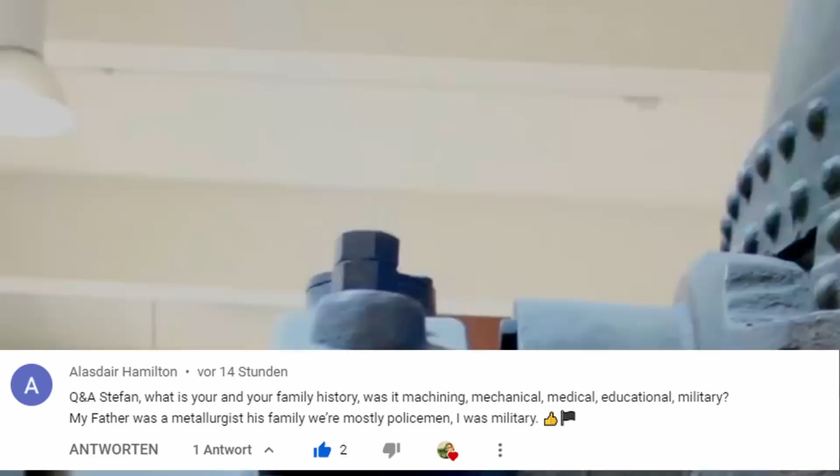So, Alasdair Hamilton asks, what is your and your family history? Was it machining, mechanical, medical, educational, military? Well, we're all kind of hands-on people. My dad was a tool and die maker. My mother was a butcher. My grandpa was a bricklayer. My brother is a Radio- und Fernsehtechniker, a TV and radio repair electrician, but today he works as a database specialist programmer. So we're all kind of hands-on. The only one who was in the military is my grandpa on my father's side of the family, but I never knew him. And myself, I served in the Bundeswehr for the 9 months that we had to do. But since then, nothing military related anymore.

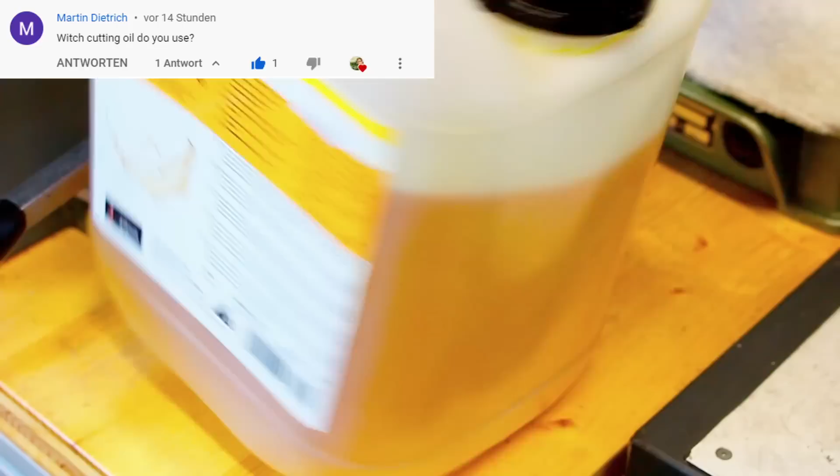Martin Dietrich asks, which cutting oil do you use? That's an easy one. I use Jokisch Heavy Duty Cutting Oil Alpha 93. I like this a lot. I think it's plant oil based. It doesn't smell. It's not very smoky when it burns. It works well in steel, stainless, titanium, and all the weird materials. It doesn't stain materials, which some of the chlorinated cutting oils do. It doesn't ruin my skin. And I buy it in these large 5-liter canisters. It's really not very cheap. I think this canister is like $100, but it lasts quite a long time.

Micromechanics and micromachining is not a common task as paid work. How do you find your clients for such niche specifications? Well, they find me. The word is out there that I do this kind of work. I have basically with my YouTube channel a showcase or a portfolio of what I can do and what I do. And people come to me with this kind of work.

And also that's kind of the specialty work that I like to take on most of the time. I do some other stuff too, but everything that's smaller than my thumb, that's what's really fun for me and where I think I can excel as a machine shop and as a machinist.

Kepa Murray asks, what are your 5 favorite bands? Do you listen to music while you're working in the shop? That's a very good question. And the answer is yes, of course, I listen to music in the shop. I listen to podcasts a lot, but also music. I'm either wearing Bluetooth in-ear headphones or I have loudspeakers.

Favorite bands, favorite 5 bands. I probably have 20 favorite 5s. Let's see. Sabaton, Hammerfall, Powerwolf, Blind Guardian, Nightwish, or Running Wild, Arch Enemy, Agatha Diamond. We can go on and go on and go on. Also, Perturbator, Carpenter Brut, things like that. Mostly metal, some dark ambient, some gothic, some things like that.

Mechanical engineering. The truth is, I haven't studied anything. I'm a Facharbeiter, means I served an apprenticeship in mechatronics, means I'm half mechanic or machinist and half electrician or electronics guy, also a little bit of PLC programming, hydraulics, pneumatics. We're basically the Swiss Army knife of automation. But in reality, I specialized on the mechanical side of things.

While on the topic of music, George M. asks, what are the best German metal bands that poor uncultured foreigners would never ever have heard of? Well, Rammstein is a simple one, but those are very, very well known. I would say Running Wild, Paragon, Powerwolf, and of course Gravedigger, and of course Blind Guardian. But those are a little bit better known. And not to forget the ever awesome metal a cappella band Van Canto. They are hilarious, they make great music. Look them up, listen to them, and thank me later.

Dwayne Dickey asks, what company did you do your apprenticeship with? The company I work for is also the company I did my apprenticeship with. And that's Siemens. The part of Siemens that's doing the RCDs, breakers, AFDDs, all switchgear stuff.

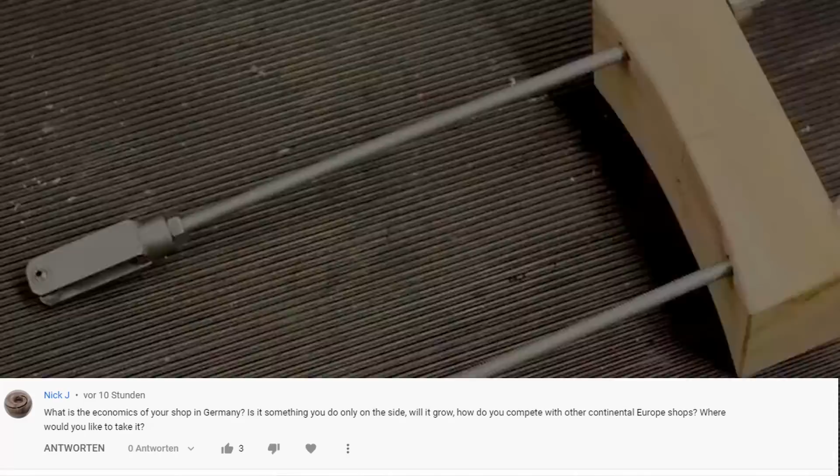I would like to be able to live completely off my own shop and obviously off YouTube. YouTube is highly volatile. It could end from one day to another if Google or the associated AdSense system makes a major change. But then I still have a Patreon where people can support me. But in the end, I want the shop to be completely self-sufficient and be able to live off it.

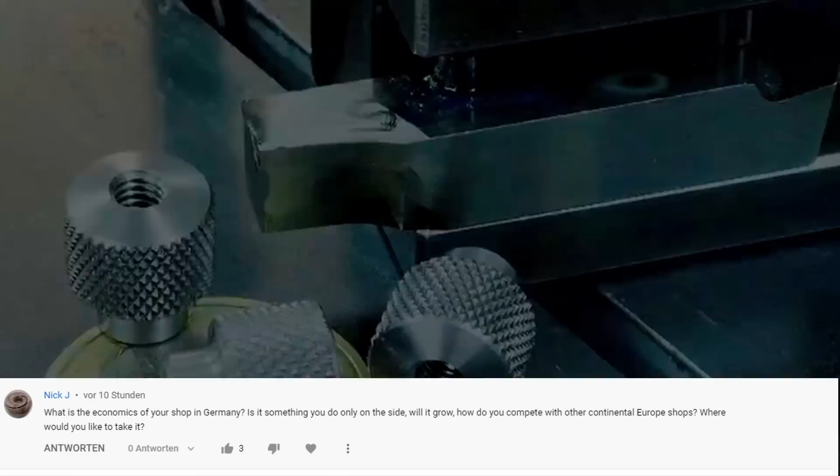I'm not interested in having employees. I want to stay on my own in the shop. Currently, I'm working part-time. I'm working 28 hours per week. That's 4 days at my day job as a mechanic or machine builder, and the rest of the time I work in my own shop doing customer work and of course YouTube.

The question of competing is not that critical for me because usually the work I do, larger shops with heavy duty machines, with large VMCs or CNC lathes are not interested in the work that I take on and vice versa. So that's working quite well for me.

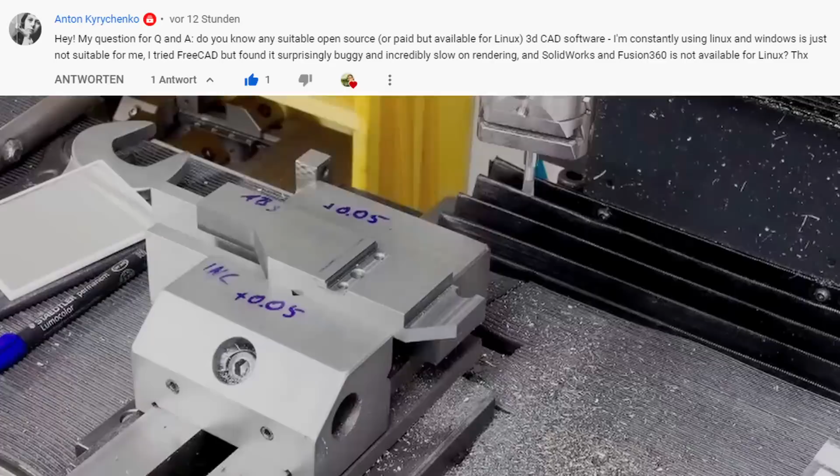Hey, my question for Q&A. Do you know any suitable open source 3D CAD software or paid but available for Linux? No. Well, yes. There is FreeCAD, but it's super janky. It works, but it's janky. It has a long way to go. I think at some point in its lifetime it will be usable, but currently, there are people who make it work, but to be productive, if you know commercial CAD packages, it's really tough.

There used to be a Pro Engineer version, I think that was before Wildfire 3, that ran on Linux, but I don't think you can get that anymore. You can run Fusion 360 in the Wine environment, or you can run it in VirtualBox. I did that quite some time, but it's also quite janky. To be honest, the best solution to run CAD on a Linux system is to have a dual boot system.

Hi, one question. What are the necessary tools to start learning scraping, with no shop at hand, just a bench, patience, and a few euros to spare? A good source for the theory would also be very appreciated. So for scraping, you don't need much. You need a scraper, preferably with a carbide blade. Yes, you can take an old file and reshape it into a scraper, but if there is any possibility, get a scraper with a brazed on carbide blade, make one yourself, or buy, for example, the Sandvik carbide scraper.

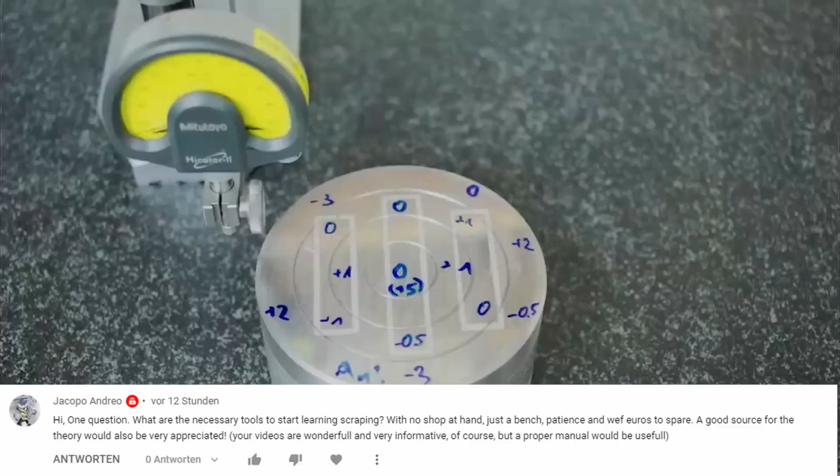Then you need a way to sharpen the carbide scraper or the normal scraper. A bench grinder with a diamond wheel will do. If you're really in a pinch, a diamond file and 2 different grits will work. There are many ways to do that. Or you can even build a diamond lap for very cheap with a piece of aluminum, an old motor, and some diamond paste.

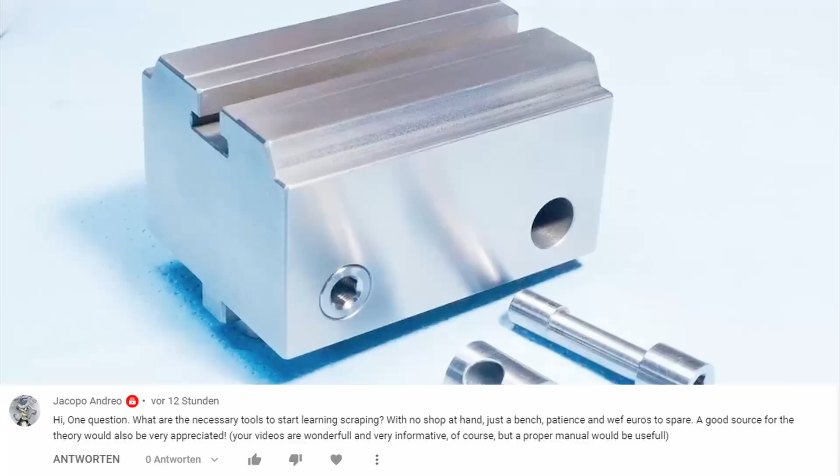Then you need something to scrape, a part that you want to work on, for example, just an old angle plate to learn on. You need a master surface, like a cheap import granite surface plate. That's honestly the cheapest way to get a flat reference surface. Or you buy a used surface plate. If you want to do machine ways, you need straight edges, of course, but that's advanced already. For the beginning, you really need just a reference surface, high spot blue, for example, from Diamond or Dykem, and the carbide scraper, or a normal scraper.

And as for references or resources, well, I have 2 videos on scraping, which are horrendously outdated, but the theory is not wrong in there. If you need it in English language, you can go on Practical Machinist. You will find there is a machine rebuilding forum. You will find about a bazillion posts on theory there, and a lot of ranting and a lot of insulting each other, but there is good information on there. And of course, Connelly's machine tool reconditioning book.

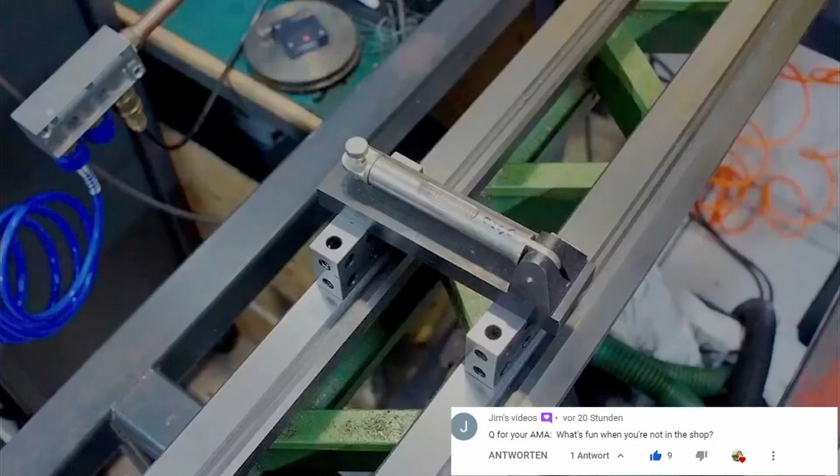Jim's videos asks, Q for your AMA, what's fun when you're not in the shop? Well, I'm an avid cinema visitor. Nothing compares to watching a movie on the big screen.

When the lights go out, it's just movie time. We pretty much watch everything that's newly released. But also the cinemas in the next city also show older movies. Like recently we watched a screening of the original Blade Runner, which I'm too young to have seen in the cinema, but that was a great opportunity.

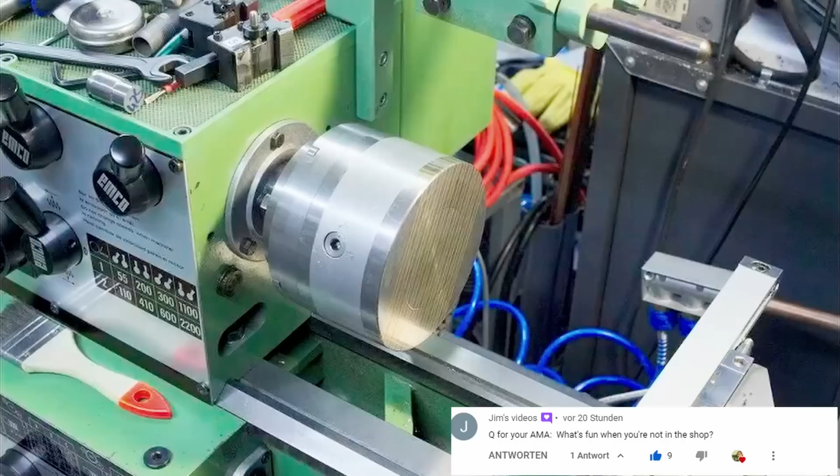Also when I'm not in the cinema, I like to watch movies in general, 70s, 80s, 90s. Action, sci-fi, and horror, exploitation movies. That's the style of movies I like.

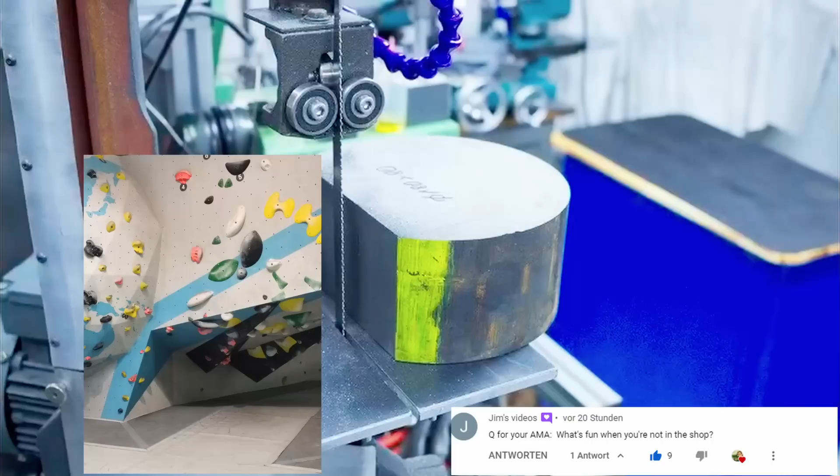Also, a little bit over a year ago, I picked up bouldering, like indoor climbing on walls that are about 4 meters tall, and you climb without safety gear. I picked that up due to a good friend, and I'm going about 2 to 3 times a week, and it's really good. It helps me. It's good for my general health. It's good for my mental health, and it's a tremendous amount of fun.

And also, I notice good progress when I go there, and there is a new route mounted in the wall, and you look at the route and you just notice, oh, I understand how this will work. I can do this. And then you just work your way through the individual steps to figure out how to solve a certain problem. It's problem solving, just on a more physical level.

Also, I have to care for a house and 1,800 square meters of garden, so it doesn't get boring for me.

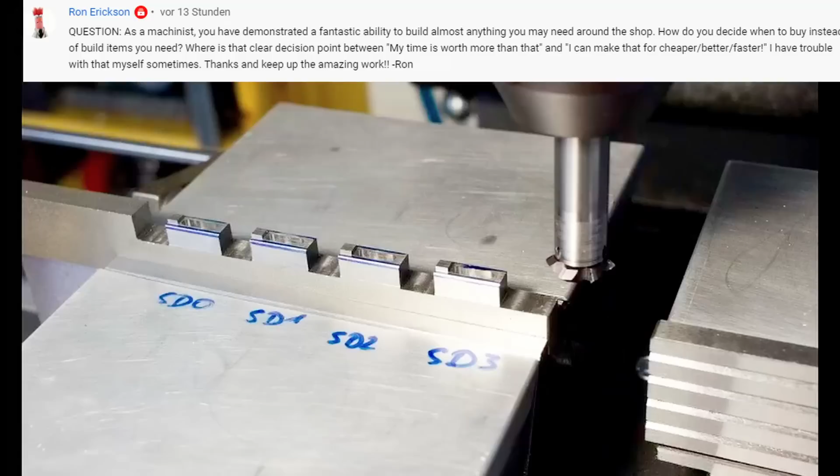Ron Erickson asks, as a machinist, you have demonstrated a fantastic ability to build almost anything you need or may need around the shop. How do you decide when to buy instead of build items you need? Where is the clear decision point between my time is worth more than that, and I can make that cheaper, better, faster? I have trouble with that myself sometimes.

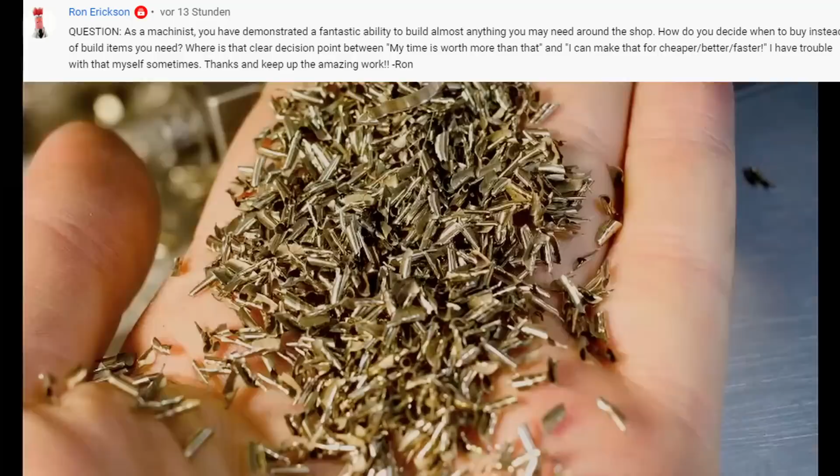Well, we all have that problem. I can make that cheaper, better, or faster is in almost every case a lie to yourself, to be honest, if you consider a decent hourly rate. When I was more of a hobby-oriented shop, of course, I had more time than money. Then the question was easy. Then I just built everything myself. You just need to go back in my YouTube channel and you see what happened. I built everything.

That has kind of unfortunately gone away since I do a lot of customer work. In these cases, often it's the case of, can I get it? Can I get it fast? And where can I get it? And then I will just order it and buy it, as sad as it is. But I still make stuff for myself, either as a recreational project like the toolmaker's cubes that I'm working on, or the rebuild and improving of my D-bit grinder, but those are long-term projects once again.

And yeah, or if it's something that you just cannot buy. For example, the low-profile V-block that Adam Demuth made and sent me one of. I have not seen something like that commercially available, so that's a case where you have to make it yourself.

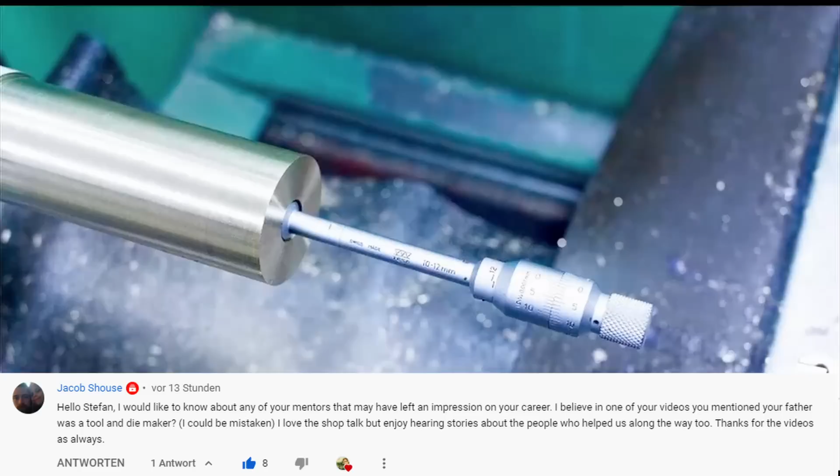Jacob Shouse asks, hello Stefan, I would like to know about any of your mentors that may have left an impression on your career. I believe in one of your videos you mentioned your father was a tool and die maker. I love the shop talk, but enjoy hearing stories about the people who helped us along the way too.

Yes, my dad was a tool and die maker, and I learned a tremendous amount from him, mostly by him just walking in the shop and looking at what I was up to and what I was working on, and just giving comments and giving little pointers and little hints.

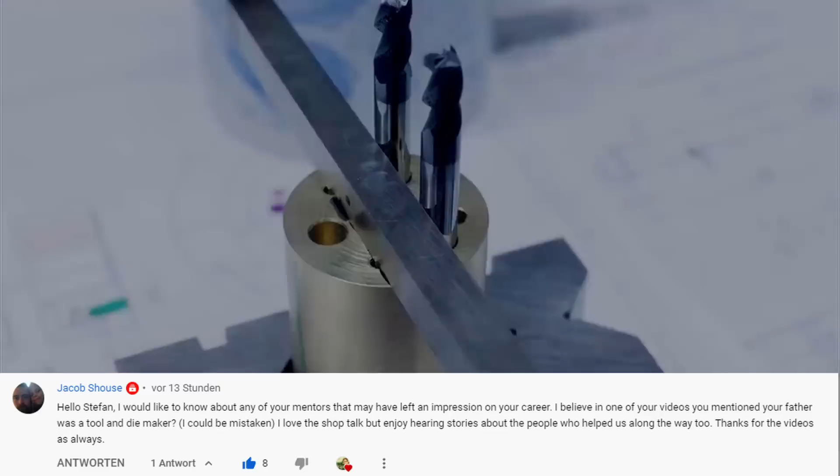In my professional life, I had a lot of people who made a large impact on my abilities today. I used to work with an old tool and die maker when I was in the laboratory, when I did mechanical stress testing and electrical stress testing on light switches and outlets. And we built all the test gear ourselves. And he was a tool and die maker through and through, and I learned a lot from him.

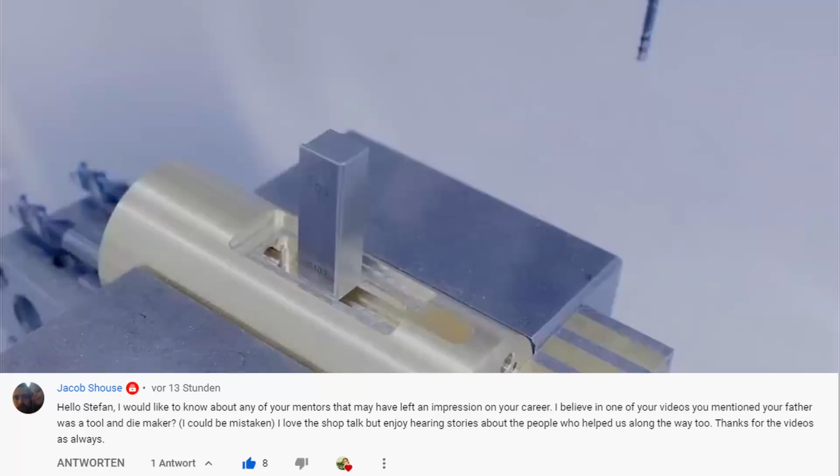Also, my foreman, when I was in prototyping at work, he had about 20, 30 years of experience in prototyping. He was not a machinist, but he was able to do bench work really well, like picking out corners in milled parts with gravers, bending parts. Bending was really his specialty, bending parts in a vise or on a press brake with custom dies. I picked up a lot from him.

We were always questioning each other when we were talking about work. I was questioning his recommendations and he was questioning mine, and so we had checks and balances on whether that was the right way to do a certain job.

Well, and pretty much every other person I came across in my professional life, I was able to learn something from. And I think you can pretty much learn something from anyone.

In your taskbar, I noticed Steam running. So do you game frequently and what games do you play? Well, look in my Steam library here. Rainbow Six Siege, 500 hours. That is probably the game that I played the most over the last years, and I enjoyed it a lot. The destructible environment is really a neat element in the game. But it seems like they take it away because it's problematic with a high level of competitive gameplay, because it's very random when you blow through a wall. And of course,

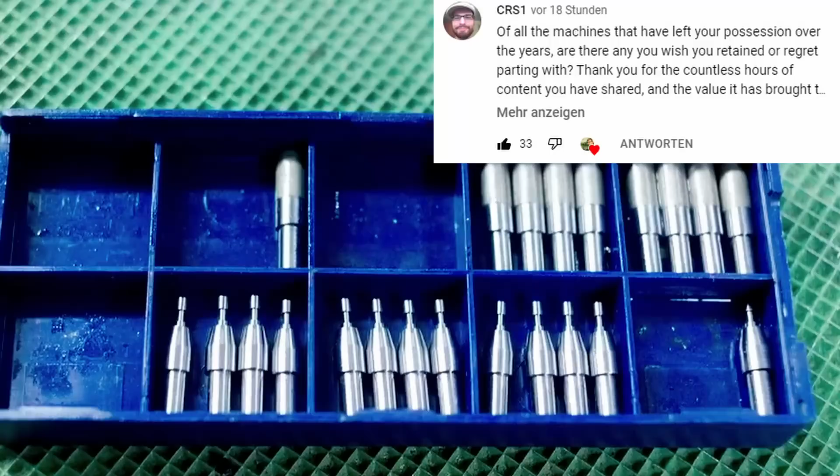Same for the CNCs. I had the easel CNC router. I had the old Deckel that I converted to CNC myself. I had the stepper motors, and I don't miss any of them. The machine I have now is the most suitable for the work I do now.

Shawn Huk asks, Stefan, what do you use for rust prevention when you're washing parts and tools in water? Well, not much. When I take the parts out of the parts washer with the cleaning solution I have in there, which is basically very strong soapy water, I either rinse them with alcohol or distilled water, blow them dry with compressed air, then I just put them away. Usually that's more than adequate for the level of humidity I have in my shop. I have usually about 22 to 25 degrees C in my shop and a humidity of 45 to 55%. And that seems to take care of rust problems good enough.

For general rust protection, I use two products which I'm not sponsored by, but that I use. One is LPS3. I think that's very common in the US. I learned it from Robin Renzetti, and you spray this on, it dries in a film, it's really waxy. I put this, for example, under the vises of my mill or under the solid tool post on my lathe, or when I have to put parts in deep storage, I will spray them down with the stuff, then just wrap the parts either in paper or in wrap foil.

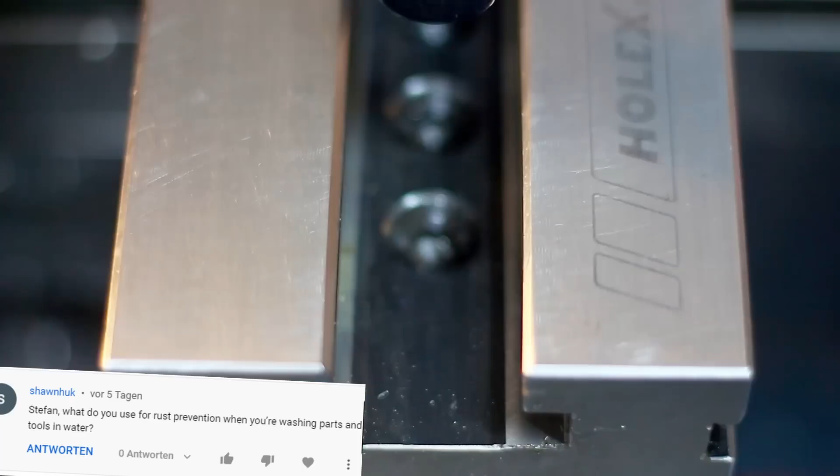And here, for comparing those two, this is the LPS3. This is a very thick material. And when it dries, it will leave a film with a real thickness to it. And this is the Ecol. As you can see, this is way thinner. And when you just spray it on in a thin layer, it will also dry that way. And this will wipe off very easy.

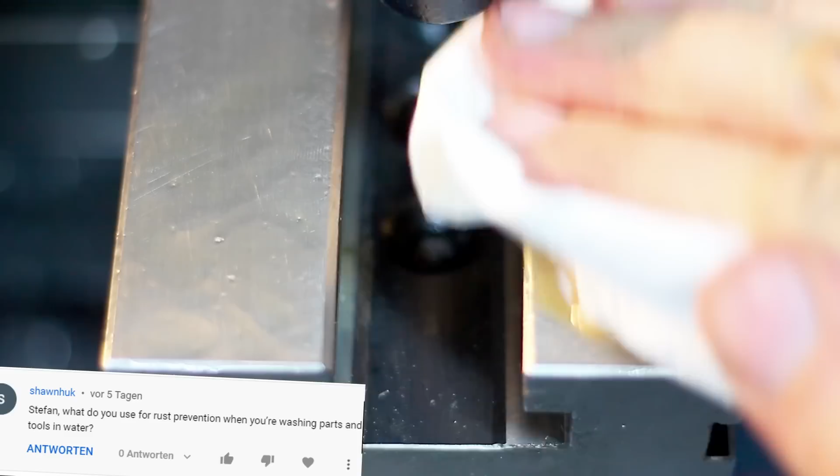And both of them are excellent rust preventives. I never had issues with them. The LPS3 stands up to coolant and cutting oil and stuff like that, like crazy. A little bit hard to get here in Germany. For those in Germany who ask where I get this stuff, there is one person on eBay who regularly sells about 1 to 3 tins of this stuff, and I usually just buy all of them when they're available.

Lars S. asks, sure, you have been asked many times, but what brand are those safety glasses you always wear? These are made by Uvex. They are prescription safety glasses, and I have two pairs of these. They are identical. Uvex is a very common personal safety equipment manufacturer here in Germany. They make safety glasses with or without prescription, safety boots, safety shoes, earplugs, hearing protection, basically everything that you need to not die on the job.

And I like these a lot. They're very comfortable to wear. They close up nicely on the side of my head, and I wear those as everyday glasses. So if you see me out on the street, I'm most likely wearing these because I have no clue where my other glasses are. Highly recommended.

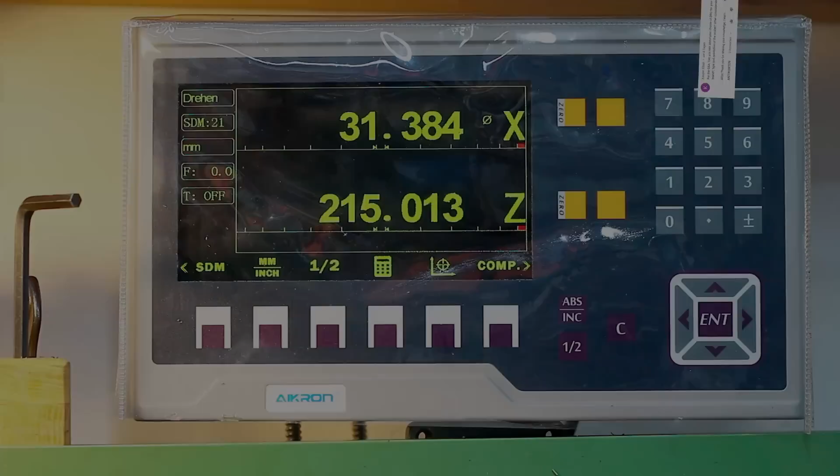Kasper Elbak asks, can you talk about the choice of DRO for your lathe? Which brand, type, resolution of the scales, other considerations? So for the longest time I used to have a different one, the old school style with the 7-segment LED readout, but I changed to an Aikron LCD DRO, and I like this a lot. It does the same thing as the other one. The other one worked perfectly fine. I put that in deep storage for cases of emergency. The LCD ones are nicer to use.

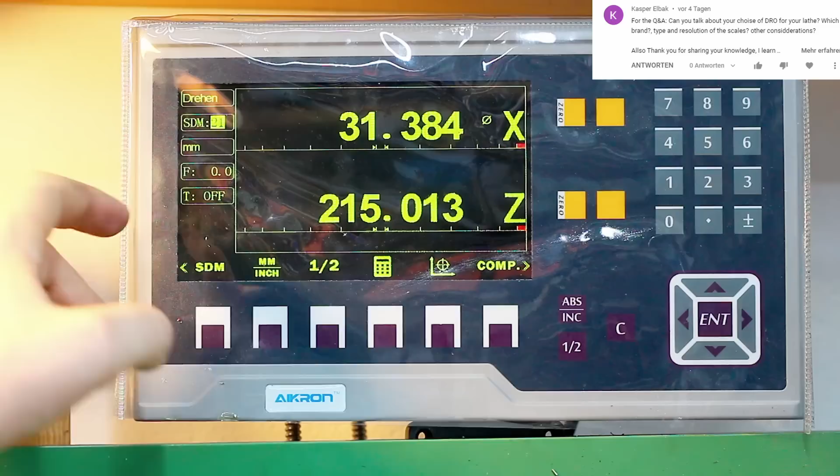On the lathe you don't need that many options because it's just a lathe. On the mill you have other options, but basically you have your different coordinate systems here. These need to be easily accessible on a DRO because you use those either for different operations or, in my case, as a tool storage. SDM21, for example, is on my lathe a parting blade. And when I switch through those, 22, 23 is a grooving tool, and you see that those offsets change when I switch through the tools. And this is absolutely important for a lathe DRO in my mind if you want to be productive, having the option to change through tools.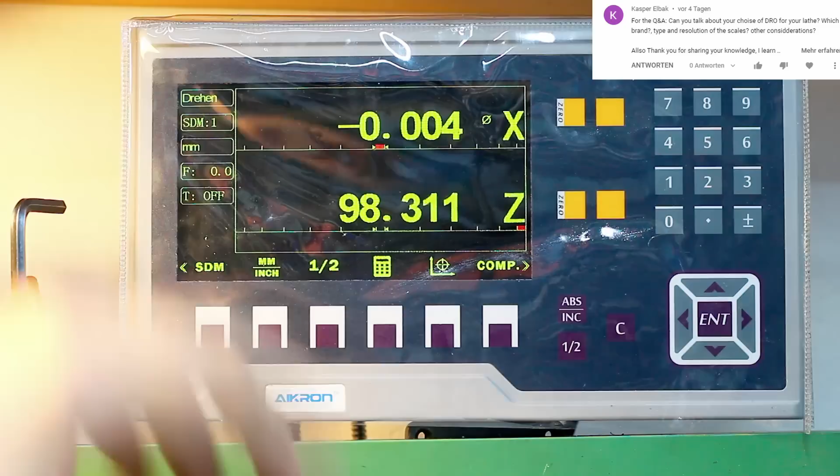Also, the LCD DROs have this indicator bar down here. This shows you when you approach your 0. When you set up a production job with different coordinates that you need to step off after each other, and you use, for example, SDM 1 to 10, and you enter the coordinates in ways that you always move the axis to 0, then change to the next coordinate system, move to 0, next coordinate system, and so on. This indicator here is extremely helpful because it allows you very quickly to approach very precisely your 0 mark. See how quick that goes?

Just by eyeballing the red bar into the center mark here, you don't even have to really look at the numbers to get it within 20 micron. Also, you want your buttons easily accessible for zeroing out your positions or for entering coordinates. You want a calculator in it. You want an easy way to switch between metric and inch.

Well, that's on the lathe. That's the most important facts on the lathe. My cross slide scale has a resolution of 1 micron, but the DRO reads it in 2 micron because I'm doubling the value to get the diameter. So this is in diameter mode. I can switch it to radius mode, then it reads 1 micron, but we're working in diameters on a lathe, so I'm running this in diameter.

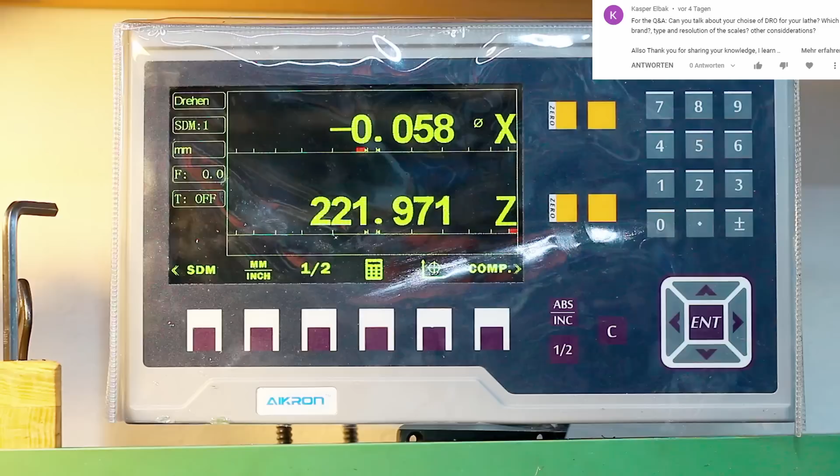And the bed slide is also a 1 micron scale, and as you can see, I can move the bed slide of this lathe relatively precisely within a few micron using the big hand wheel. Also, a very useful feature, it shows the current feed in millimeters per second. I think there is a software update from Aikron coming that changes the feed display to millimeters per minute, which is the way more common unit. So yeah, that's the readout. And let's go to the mill quickly.

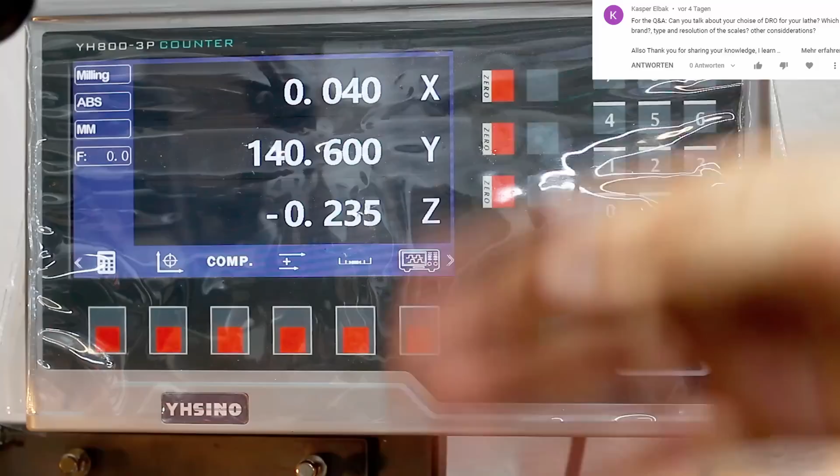This is a Yhsino from, I think I bought this on Banggood for a ridiculously low amount of money, and I would not buy this again. It does not work with all linear scales. The linear scales I have, they have an A, B and index signal, and they also have the negative signal. So A negative, B negative. And this readout cannot handle these linear scales in my case.

I had to change the wiring on those linear scales. It means I had to cut the wires for the negative complementary signal. Now it works. In theory, this makes the readout and the linear scales more prone to counting errors, but I haven't noticed any problems so far, so I'm keeping it.

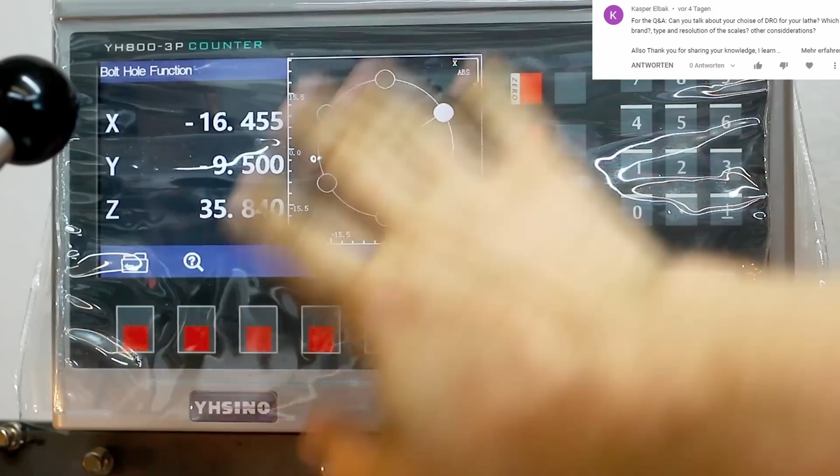On a mill readout, you have the bolt hole circle function, and on a graphical DRO with an LCD, this is really neat because you really have the red dot, which is your current position, and you just crank it in position by eyeball, and then you look at the numbers and get it into final position. So this is way faster than just looking at numbers and moving it. Then you just can switch through the points that you programmed and move to all those positions and drill your holes out, or whatever operation you have to do.

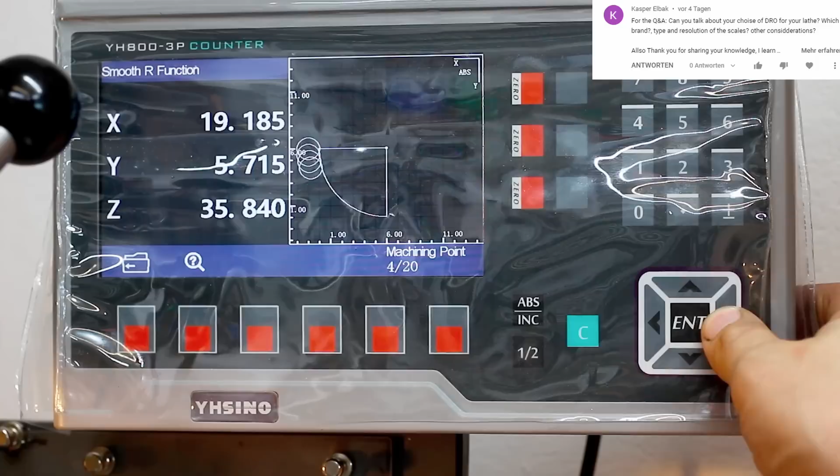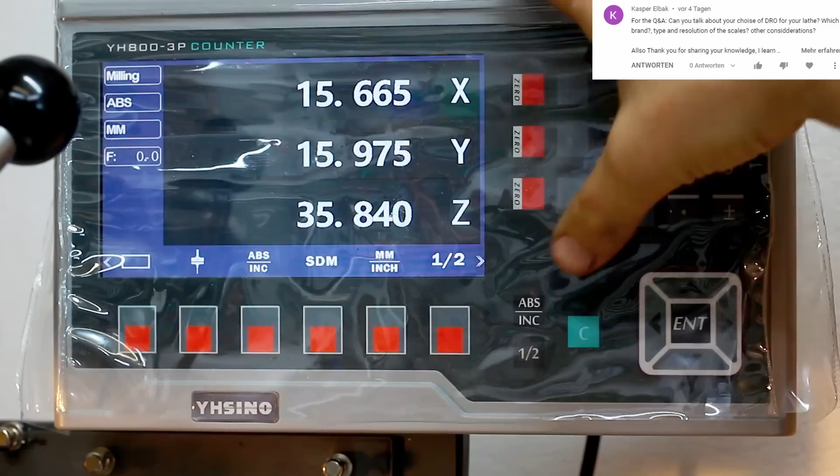You also have this for hole arrays. You can do circle milling, which allows you to cut radii in a cusped manner by moving off in individual steps and creating kind of a radius that way. You can do this in XY or also in XZ and YZ if you want to do a top-down radius. Then you have a function to cut a pocket. Don't use that ever. Probing, this one doesn't have probing, doesn't have the input plug for it mounted. Yeah, that's the important functions on a DRO for a mill in my eyes.

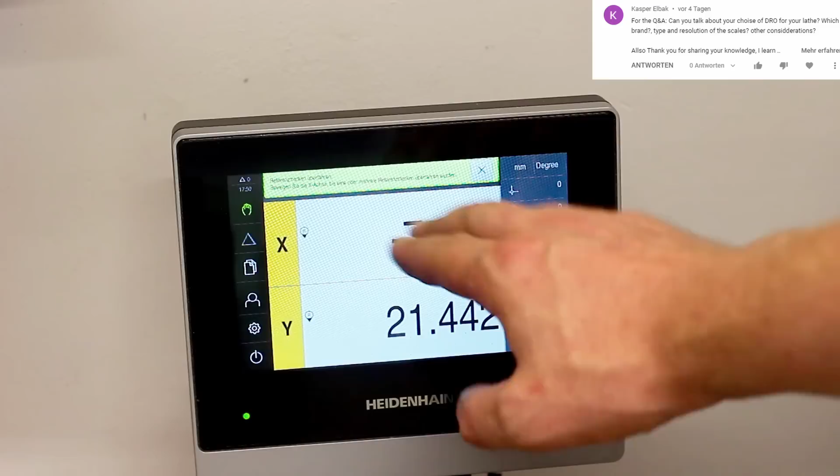Little trick, if you have a touch display DRO, go on the internet, find a place that cuts screen protectors to size, and have them make a screen protector in the Gorilla Glass equivalent matching your DRO, and this will protect your horrendously expensive DRO display. And this is really nice. I have it set to 1 micron showing. The linear scales are analog, and this readout interpolates them, I think, to 0.1 micron, and I can set it even to that, but then it gets a little bit jumpy. But in this case, 1 micron is perfectly fine.

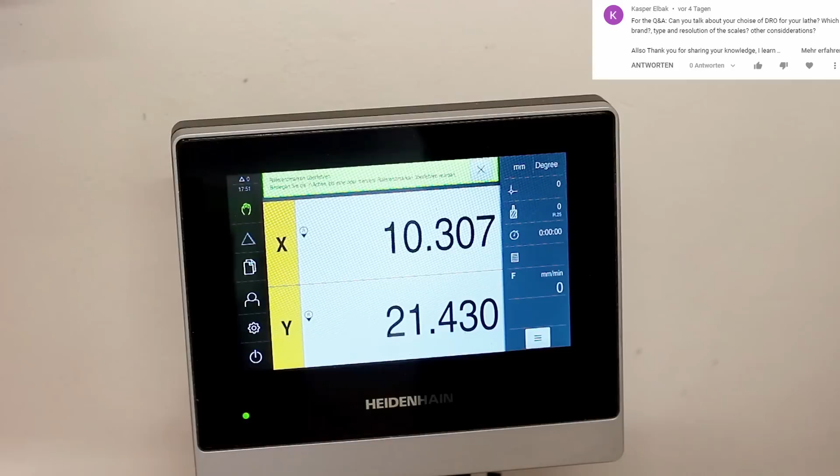And this also shows the current feed rate when you hand crank it in millimeters per minute, which is the more sensible unit. And this is very nice when you dress, for example, your grinding wheel and want reasonable, repeatable parameters, because you just can traverse, for example, with 300 millimeters roundabout over the diamond and get your even dress. It has some functions like bolt hole circle, which I don't need here on the grinder, because this is a mill and lathe readout. They don't make a specific grinder readout.

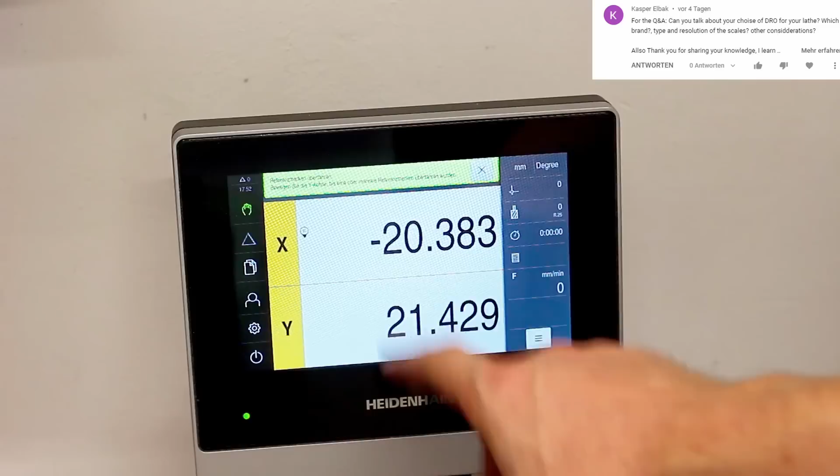Also, my axes are named wrong. It's XY in my readout. Usually it would be Z for the height elevation and Y for the cross traverse, and the table movement back and forth would be X. But I keep it this way because I can use the bolt hole circle function in here to do radius grinding. This doesn't work if the axis names are off.

Back at the mill for a second. The resolution on the mill is 5 micron per division. I found that perfectly adequate for the style of work I do.

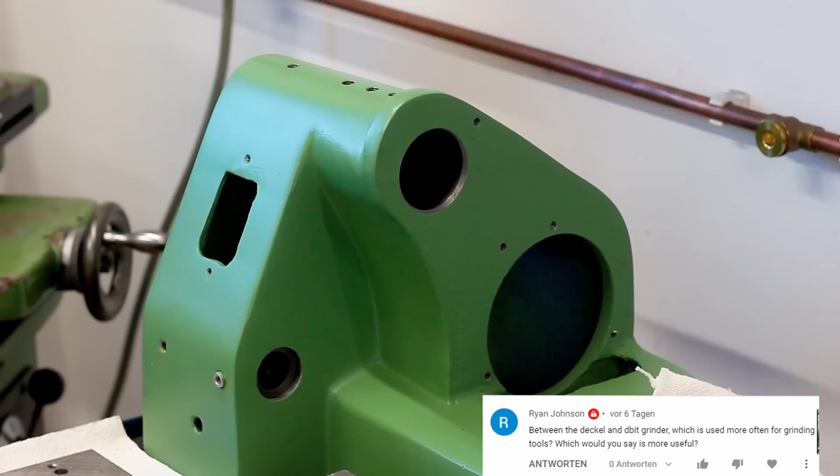Ryan Johnson asked, between the Deckel and D-bit grinder, which is used more often for grinding tools? Which would you say is more useful? So I have a little bit of a grinder addiction. I have the D-bit grinder. I have the Deckel S1 tool and cutter grinder, which is a full-fledged tool cutter grinder. And I also have the Bema surface grinder. Between all those 3 machines, they all serve for tool grinding in my shop.

If I could have only one machine for grinding, it would be a surface grinder, because it's the most universal machine from all 3 of them. And it's the best surface grinder, and it's the best cylindrical grinder with accessories. It cannot do spiral flute tooling, or not without heavy trickster movements. But apart from that, if you want a grinder and you can afford it and you have the space for it, a surface grinder is the way to go.

For example, a small Harig 6x12 surface grinder would be a tremendous addition to any shop. Not only surface grinding, not only cylindrical grinding using a spin fixture or a punch grinder, but it's also an excellent tool grinder for lathe tools, for example. But it can also do mill tooling if you're creative.

Then we have the S1 tool and cutter grinder. Super cool machine, can do spiral flute tooling, can do tooling between centers very easily, very fast to set up for a tool and cutter grinder. You need sometimes to wrap your head around all the possible movements, and sometimes that's the hardest part of grinding tools. I would say this is more of an expert machine. I have no clue why I have it then, because I'm not a tool grinding person, but I like to use it.

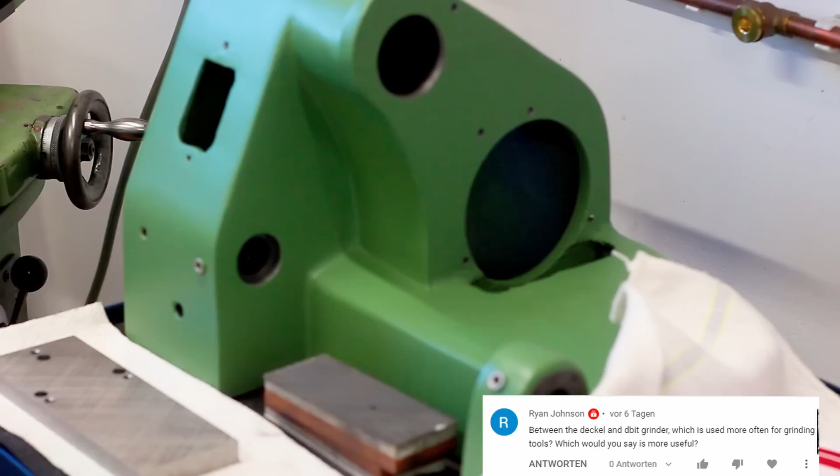And then the D-bit grinder. D-bit grinder in parts, part assembled here. The D-bit grinder is a must-have machine if you can have only one grinder and cannot afford a surface grinder, but you need tool grinding capabilities, then D-bit grinder. Great for grinding lathe tools. It's really good for that. It's good for grinding D-bits because it's made for that.

You can do 4 facet grinds on drills up to maybe 10 to 12 millimeters. Very good with it. You can cut carbide to length with it. You can cut high-speed steel blanks to length with it. You can do a little bit of cylindrical grinding on it, like creating a stepped punch or something like that. For the space this machine requires, it's almost ridiculous what it all can do.

Don't bother with the accessories like the helical grinding attachment. That's no good for this machine. It's too wobbly. Just get one with the regular indexing head, with the style of collets you prefer, probably 5C because they are more common and larger in size. Mine uses the Deckel collets.

Maurice Lucas asks, are you finished with the flux capacitor or is it still work in progress? Well, time will tell.

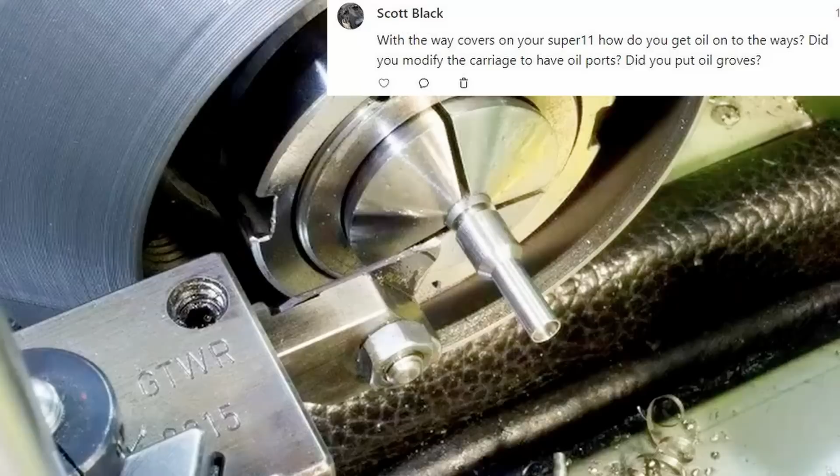Scott Black, with the way covers on your Super 11, how do you get the oil onto the ways? Did you modify the carriage to have oil ports? Did you put oil grooves? No, the carriage is still original. And I oil the bed and the carriage just as Emco intended by putting oil on the ways and cranking the carriage over it. I do that with a regular oil can. I just lift the way cover up a little bit and put some ISO 68 weight way oil onto the ways.

So der ProtoTyp asks, hi Stefan, one for the list of questions. Considerations on dust management in small shops where separate shop rooms for every department is not possible. I'd be especially interested in your thoughts on grinding dust, dry, wet grinding, carbide dust, and what filters and how often you change them.

So my general solution for dust in the shop is this contraption. This is a Festool CTL Mini dust extractor, a glorified shop vac with a relatively good filter class, as long as you run it with the filter bags. The filter bags are part of the filter class on these type of dust extractors. The problem is those are horrendously expensive, the dust bags that is. If you just use it to suck up chips or something like that, that gets very expensive very fast.

The solution, which has been shown on the internet about 1 million times before, is a cyclone separator. It's this thing up here, this funnel looking part. This will separate all solid media that has some reasonable weight to it out of the airstream into this metal bucket here on top of the dust extractor, and only air and fine dust will go in the dust extractor. And the combination of those two stages will filter out basically everything.

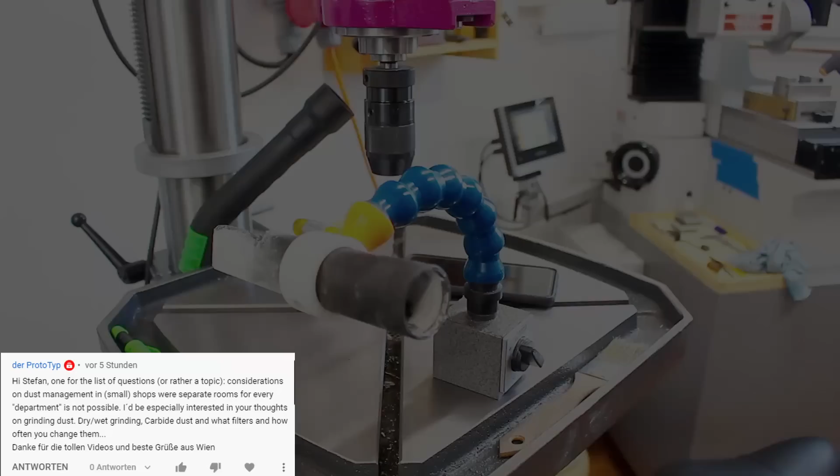This is one thing that I use on my machines. It's just a 50mm magnet base. I turned an adapter with a ball end that fits I think 3/4 inch Loc-Line hose. Then I have this ring on the end here that's just screwed into this nozzle. This nozzle, I cut the end down, I put a filler piece in there, and then I put a screw from the outside through this ring inside the filler piece, and this holds it very rigidly on there.

And the inside is turned to a taper. So when you take your regular shop vac nozzle and you push it in there, it will lock nicely due to its tapered shape. And the Loc-Line allows you to orient this very quickly and very easily wherever you create dust.

This nozzle is modified. I welded the end shut with a piece of plastic that I cut out of the side of this thing. Then I opened up the side completely with a die grinder and abrasive wheel. And this is so I can get behind a grinding wheel, for example, on the surface grinder when I grind stone or carbide. So the grinding wheel shoots the stream of dust directly into this nozzle.

Also, I can of course use regular straight nozzles like this one for a more pointed approach to dust extraction, for example on the milling machine when I mill phenolics. So this works really well. It's very simple, it works very well. Can't complain about it, very easy to make. The most expensive part is probably a good magnet. You can also use, of course, a large magnet out of a loudspeaker or something like that, but these are nice because they are switchable.

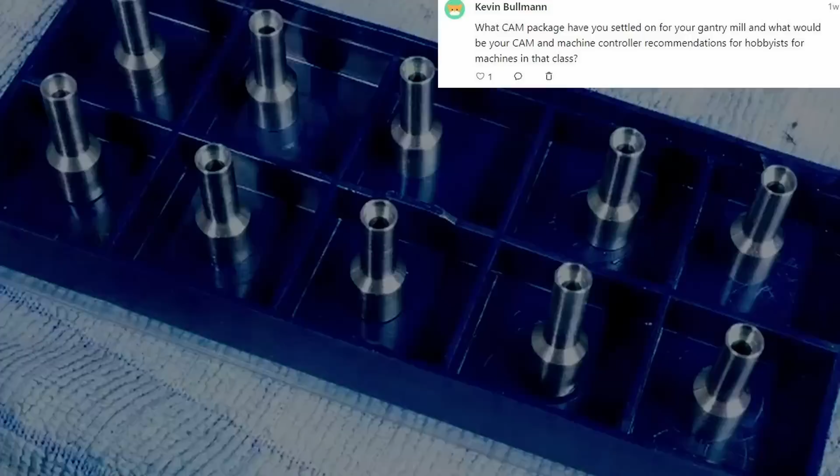Kevin Bullmann: what CAM package have you settled on for your gantry mill, and what would be your CAM and machine controller recommendations for hobbyists for machines in that class? So for the CAM package, Fusion 360, honestly, it's the most powerful CAM package that you will get for as little money. There is still the hobbyist license, it's limited. It doesn't allow rapid movements and tool changes anymore, but still toolpath generation is top notch.

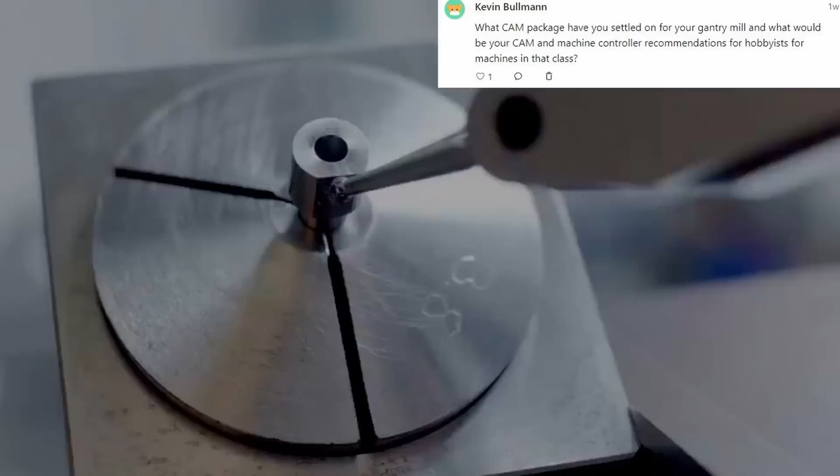If you get the license, the yearly subscription, I think that's $500 a year. That's real money, I absolutely understand that, but in my case, commercially, that's pretty much nothing. The big advantage of Fusion is just the integration of CAD and CAM together. When you change your CAD model, it pulls through into CAM,

and it's so much quicker than an external CAM software where you always have to export a STEP or IGES model from CAD, import it into CAM and redo your toolpaths, and that's a whole story. So yeah, it is what it is. Unfortunately, we don't have many options here. That's the CAM recommendation. For the machine controller,

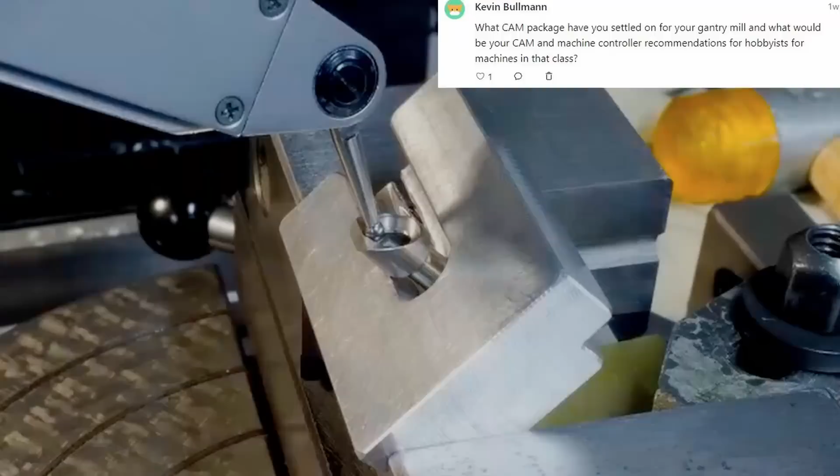if you're a little bit adventurous and are willing to put time into it, LinuxCNC. It's extremely powerful. You can either run it off the parallel port, or you can buy the Mesa hardware, which is an FPGA card that does all the step generation. All the time critical stuff will be done by the Mesa hardware, and it's super fast, super reliable.

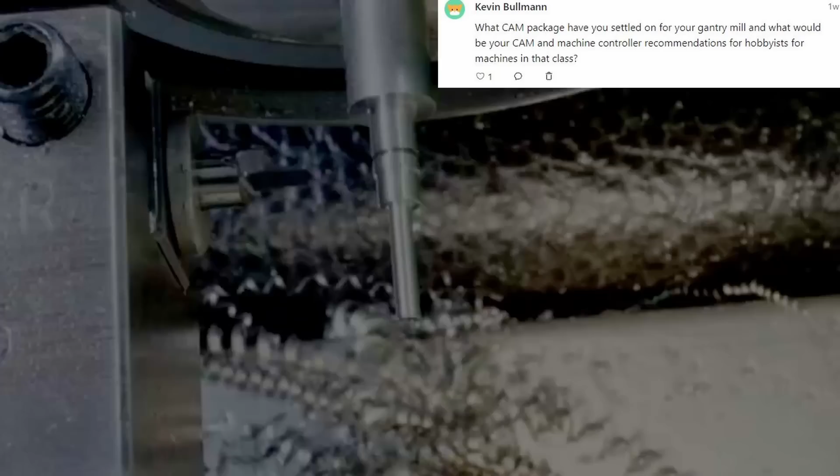You can do closed loop systems with linear scales. It can be as good as an industrial controller, but you can also run it as a pure hobby style parallel port controller. Or you go the route of, for example, what I have on the CNC router, it's Eding CNC. It's either USB or, in my case, over Ethernet. It works okay. It has some limitations on 3D machining in regards to how fast it can process G-code lines. If you run 3D code too fast, it will start to stutter and have problems in that regard.

Okay, let's continue. Kagan Luig asks, do you have tips or tricks or preferred products or fluids that you can share on operating while keeping smoke, fumes, dust, mist, chips contained in the basement? Well, since I have the shop attached to the house, or I used to have it in the house basement, containing chips and fumes always was an issue. I don't want to smell the whole house up with solvents or have chips all over my bedroom.

As for the chips, strict shoe discipline is a simple way to get around it. You have shop shoes and you have shoes for everywhere else. In all honesty, I like the good old Croc for the shop when I don't do heavy lifting. They're very, very comfortable. You can get them in any color you want. They are not crazy expensive, so when they are all beaten up and worn, you just get new ones. And they are quick to change from house to shop and back and forth.

If I do heavy lifting, machine moving, operate heavier equipment, I will wear steel-toed boots, of course. But apart from that, I will change shoes whenever I leave the shop or go into the shop. And then I skip very smelly products. I don't use brake clean. I never found the need for brake clean in a machine shop. I'm not a repair shop that works on tractors and stuff like that.

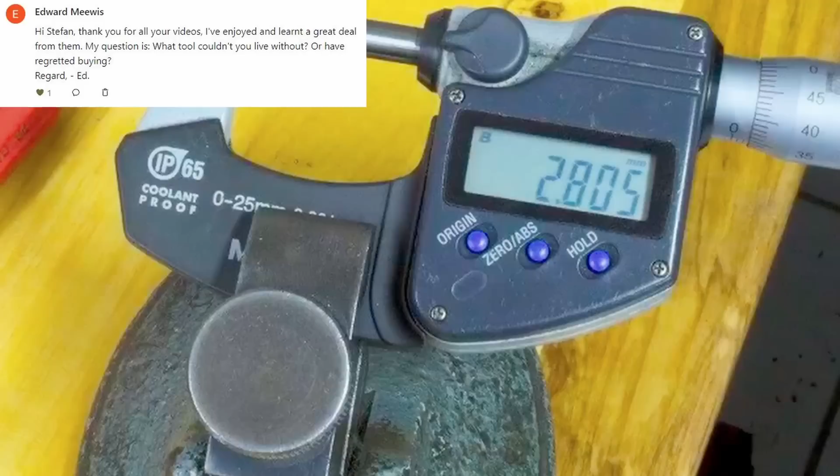What tool I have regretted buying? I would say there isn't really a tool that I regret buying. I regret buying BobCAD, the CAM package that I used to use. That was an expensive mistake.

Morgan Malmberg asks, "Hi, how do you switch forward and reverse on your lathe so quickly?" The machine has a 3-phase motor, and I put a VFD on it, a variable frequency drive. This allows to run the spindle in different speeds. You can change the frequency, and that changes the RPM of the motor. And also it allows active braking of the motor. And when you do active braking, the energy of the motor needs to go somewhere. And for that reason, I added a brake resistor.

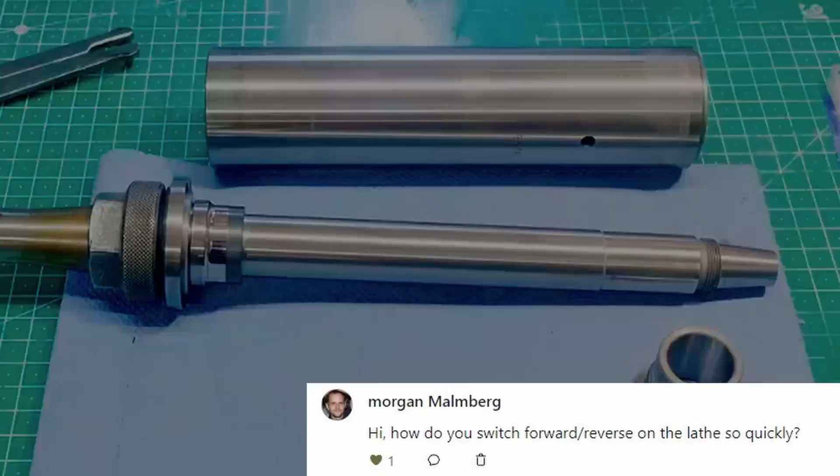If you buy a VFD, it will usually come without a brake resistor. And the manual will tell you for what motor power you need what brake resistor. You go on the internet or to your preferred electrician and ask them for a brake resistor of the value that you need. They come in a resistance and a power rating, and those two need to match up. The power rating can be higher because that's just how much power it can disperse without catching fire. And then you put that on the VFD. You tell the VFD that it now has a brake resistor, and then this will actively stop the spindle in a heartbeat. And that's the reason why I can change the speed on the spindle so fast.

Sam Coot asks, I have two questions, one work-related. How do you go about planning your order of operations? How do you plan it out on paper? Or do a test piece if it's more complicated? I find sometimes in a work order, halfway through I made a mistake and scrap a part. I'd love to know how you do it. Also, I know you love Blind Guardian. Any other power metal bands that are right up there for you? Do you listen in the shop at times? I answered the music questions, I think, to an extent, so I'm just concentrating on part one here.

So, order of operations, it comes from experience, of course. Having done prototyping at work for several years, I got pretty okay at deciding, for example, the order of operations, if I need to build a custom fixture or if I can just super glue gauge blocks to a vise and be done in half an hour. The problem is when you do skip fixture building in some cases and it turns out to be a return job, you will bite yourself in the you know where.

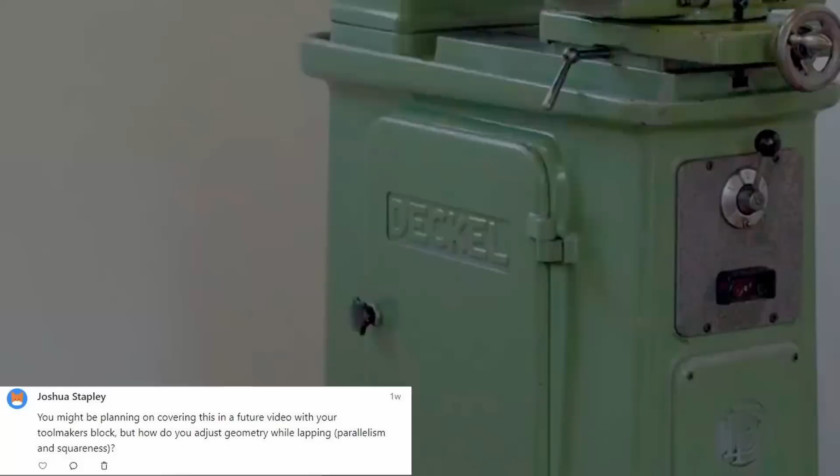Joshua Stapley asks, you might be planning on covering this in a future video, but with your toolmaker's block, how do you adjust geometry while lapping? Parallelism and squareness. Well, you influence lapping by moving the hand pressure on the block. If you want one side to be more aggressively lapped than the other one, you put your hand there, or you apply a little bit more pressure. If you need one side to be lapped less, you can also have it overhang over the side of the lapping plate and spare it that way from being lapped, and then you come back onto the whole surface and equalize it out, and that way you can shift the geometry around.

It's relatively slow. There is no real manual how to do it. You need to get the feeling how to do it yourself. Whatever gets you to the goal of the correct geometry on the part is the correct way to do it.

Comrade Bob asks, tell us about the cats. Well, that's these two fellows here. On the left, that's Ernie, and on the right, that's Bert. Ernie and Bert. There is not much to say about them. They are cats, they are assholes, and they are the most lovely assholes around.

Mumblebee B: would an electronic lead screw such as the one made by James at Clough42 work for you if you make customer parts? Yes. Next. No, in all seriousness, yes, it would work. There is also the ELS, electronic lead screw, from Rocketronics, and I used to have that on my old lathe, and it worked brilliantly. It's really a good product. But the EMCO, in all honesty, is good enough with its change gear setup, and it's working just fine for me. I don't want to do the modifications to that machine anymore.

Eike asks three questions. How do you calculate offers for projects like the lamp housing where you need special tooling? Rough guessing how long it takes to build special tooling based on your experience, and some projects leave more revenue and others less when you make fixed price offers that are a bit off? Or are you offering riskier projects based on your hourly rate, telling the customer it will take Y to Z hours, and you charge them by the hour?

Well, I do not charge by the hour. I look at a project, I will give the customer a quote, and then we will negotiate if necessary. And then I will make the part to the quoted price. I will not renegotiate if I take longer or it's getting more expensive. I don't do that.

When I look at a project, I already know from experience when I need special tooling, like the lathe tool for the Edison thread on the lamp housings. I knew that this is something I need to make, and that will require about 1 to 3 hours, and I just add some hours into my quote for special tooling.

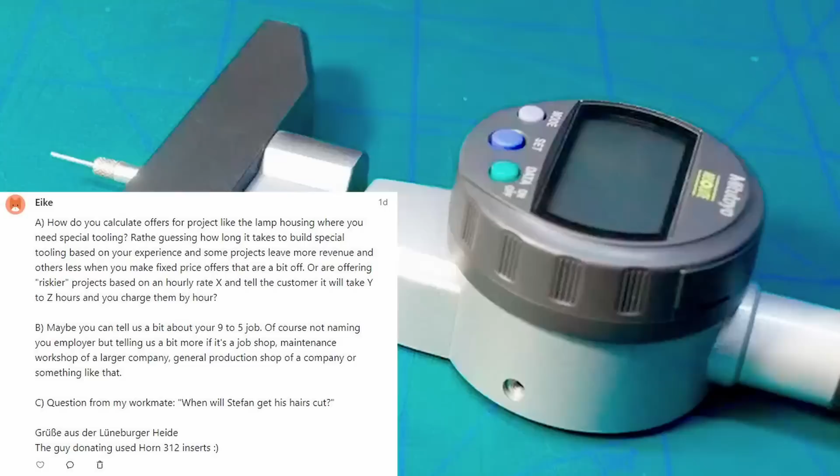The upside of having a fixed price is I'm easy to distract in the shop. I'm constantly on the phone or on the PC checking something and just bumbling around. And that doesn't change the price for the customer. When you charge by the hour, that really gets complicated because you have to really keep track of your time.

B, maybe you can tell us a bit about your 9-to-5 job. Of course, not naming your employer. Well, I did that already, but telling us a bit more if it's a job shop, maintenance workshop of a larger company, general production shop of a company, or something like that.

I mentioned it already. My current shop is in a large company. We are the special machine building division. We build all of our in-house production equipment. That's automated assembly equipment and a little bit of inspection equipment too. We make a high number of our product, and for that reason the automation has to be relatively fast and very, very reliable. It's robotics, it's mechanics, pneumatics. We have the electrics.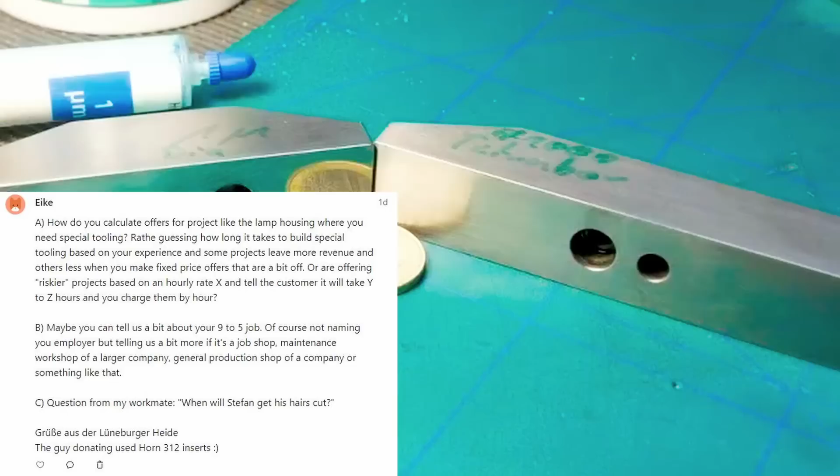For that we have electricians, but I'm also allowed to do some electric work. We have programmers for the PLC and the robots, but I'm basically 90% mechanic and a little bit of machinist when things need to be modified. We get the parts machined in-house or from an outside job shop. We get the parts, we check them, we do some finessing work, usually the deburring. We have a very high standard of deburring. We do that ourselves. We assemble it.

When we set up a machine and it's running and the machine is not working as intended, we will modify it to make it work. We do start to finish on production equipment in-house, and that's what I'm doing.

C, question from my workmate: when will Stefan get his hair cut? Well, do I have to?

Greg La Roche asks, how do you organize storing tools and other parts and pieces? That's complicated. In all honesty, I plan to do a video on shop organization and how I keep a kind of clean shop. The answer is I strictly decide what to keep and what to throw out, and what I keep goes somewhere in a fixed place.

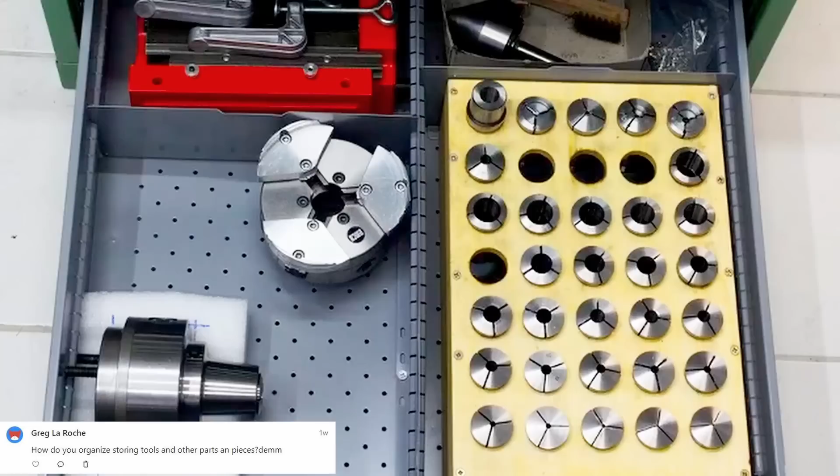As you can see in this picture, I'm not big into specific drawer inserts with cutouts because stuff changes a lot in my shop. From one day to the other, I might change my indicators, or the whole drawer might change around, and then I don't want to deal with a bunch of foam or wood cutouts that I have to move around. In this drawer I keep collets and chucks, for example, but it might change. I might get rid of one of the chucks and buy a different one. Then I just need this room in this drawer to change.

This is, for example, how I store my 1 meter long sticks of material in the smaller diameters. This is 40 millimeter PVC pipe that I hot glued together and bolted against the wall, and it's all labeled. All the stock that I have in there is labeled too. In this cabinet, I have shorter drops up to 30 centimeters length. Again, everything is labeled on the ends, engraved or stamped or written on what it is. With stock, that's always the most important thing. If you don't know what the stock is, you can just throw it into scrap. Even for hobbyists, I think it's important to know what you're working with.

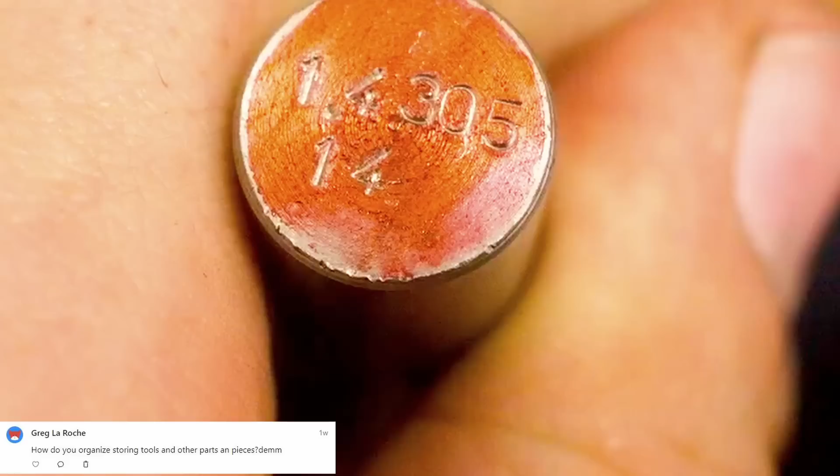Here you can see the engraved and stamped material numbers on the ends of those material sticks. And here is what I do for the 1 meter sticks. I have one of those P-Touch label printers, and I just print a flag like this and glue it on the end of the stick. Or here, stamped. This is a good example. As you can see, I have a lot of things on the wall. A lot of my equipment or accessories goes on the walls. The machines are pushed up against the walls, and I have a ton of shelves on the walls.

For example, for the taper tooling for the mill, there is a shelf underneath it with mill work holding, and above the lathe there is a shelf for all the multifix tool holders, and so on and so on. And that's just the way I like to have my tooling accessible.

Russell Hayward asks, how do you calculate change gears for a thread pitch or feed rate? That's a very good question that I cannot really answer. I don't know how to do that correctly, because depending on the gears and the lead screw, there is more than one solution to this equation, how to get to your change gears. I know that there are change gear calculators on the internet, either as an Excel spreadsheet, or I think there are even dedicated programs. You might have to search Google to find that. I seriously cannot give a good answer for this.

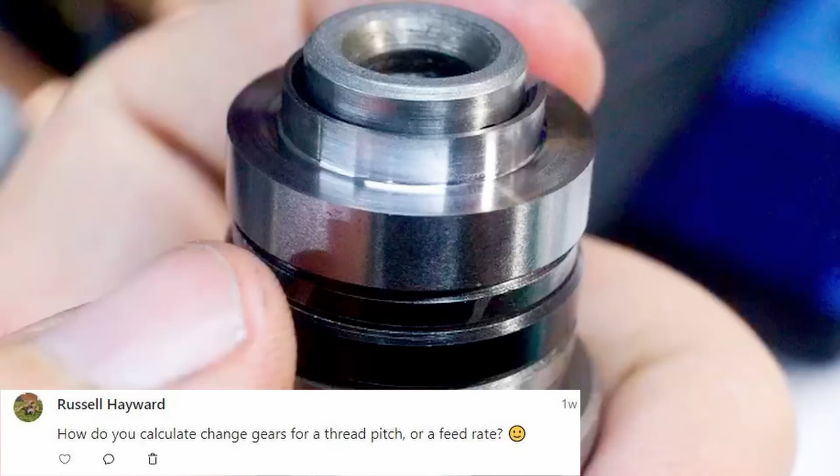Despite using change gears, the EMCO lathe came with a change gear table that has pretty much all possible change gear combinations for certain thread pitches in it.

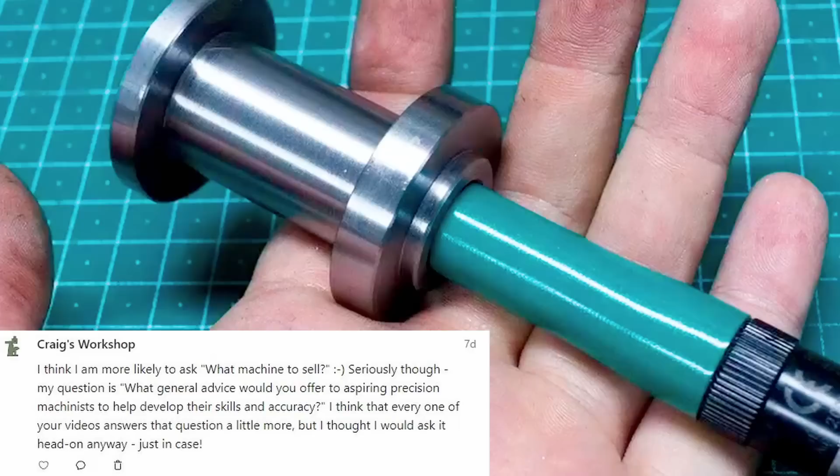Craig's Workshop asks, what general advice would you offer to aspiring precision machinists to help develop their skills and accuracy? Do shop projects. Find a skill that you're interested in, like working precise, and then just choose a shop project that will ask you to work precise. If you want to learn scraping, find a scraping project. If you want to do a surface grinding project, make parallels. If you want to learn video editing, edit videos, and on the way learn it.

And also for generally developing a certain accuracy in your work habits, it's just: work as clean as possible, measure as much as possible, question everything that you do, check everything with an indicator. If you haven't checked it, it might be off, so check it.

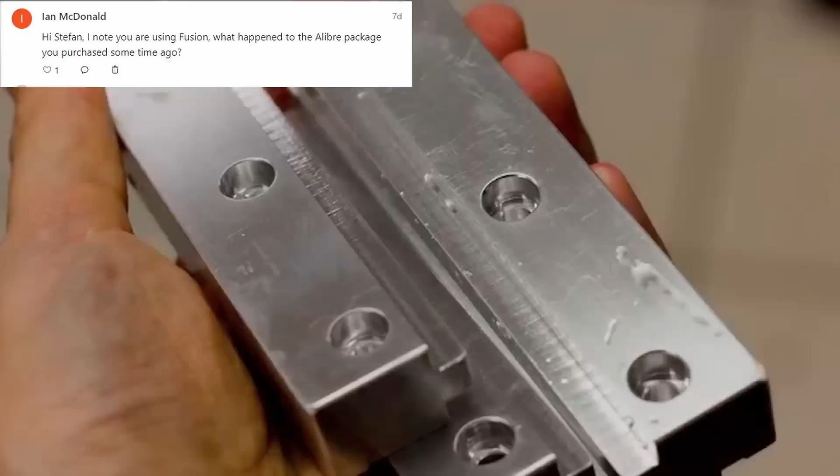Ian McDonald: Hi Stefan, I note you're using Fusion. What happened to the Alibre package you purchased some time ago? Well, I still have it, but to be honest, we all make mistakes. I made a very expensive mistake here by buying Alibre and Bobcat. Both work well enough, but I had serious problems with Bobcat on the toolpath generation time. I did some parts for a customer and I had toolpath generation times over an hour, which Fusion did in 5 minutes, and it was only a 2.5D toolpath.

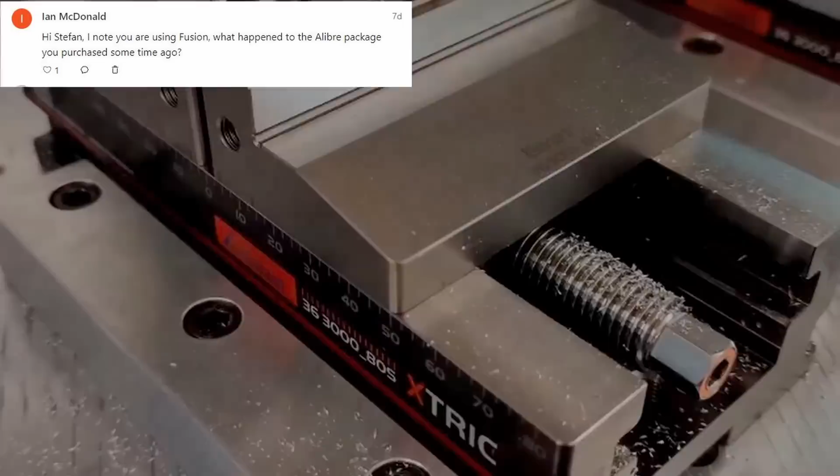And that was the reason to get a Fusion 360 subscription as fast as possible. And that allowed me to finish that project very quickly. And in all honesty, the workflow with a separate CAD and CAM package is a logistical nightmare. The way Fusion has integrated CAD and CAM in one is so much faster to work with, especially if you have to iterate through many versions of the same part or project.

Wannes Sels: I'm working on an old high precision machine which needs 1 or 2 new parts. I'm creating the specifications, but I'm struggling a bit with drawing the dimensions and features versus describing how and why the part will be used. Even if I have the original drawings, some constraints or requirements may not apply to my use case, and another approach might be better suited or easier to manufacture.

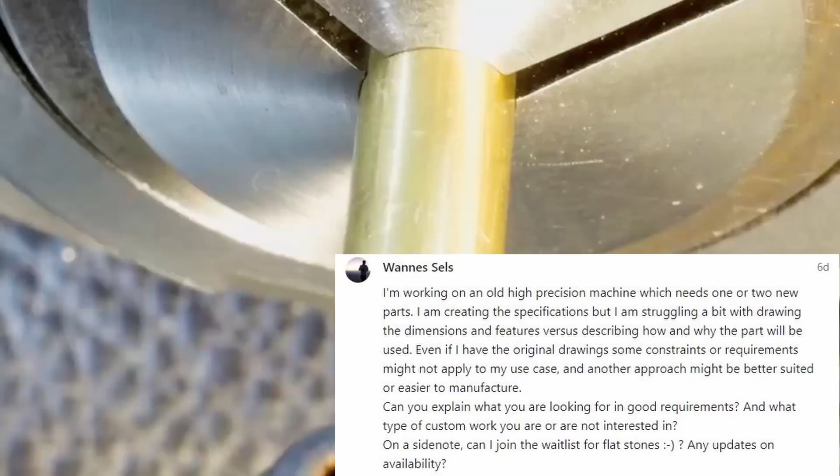Well, what you describe is the problem in all of engineering and machining. Deciding and understanding tolerances, how tolerances affect each other, and where you need certain tolerances and constraints, or geometric tolerances like flatness, squareness, concentricity, and things like that. You cannot really say how you will learn that. You have to pick it up over time, and you need to get an understanding how things work together.

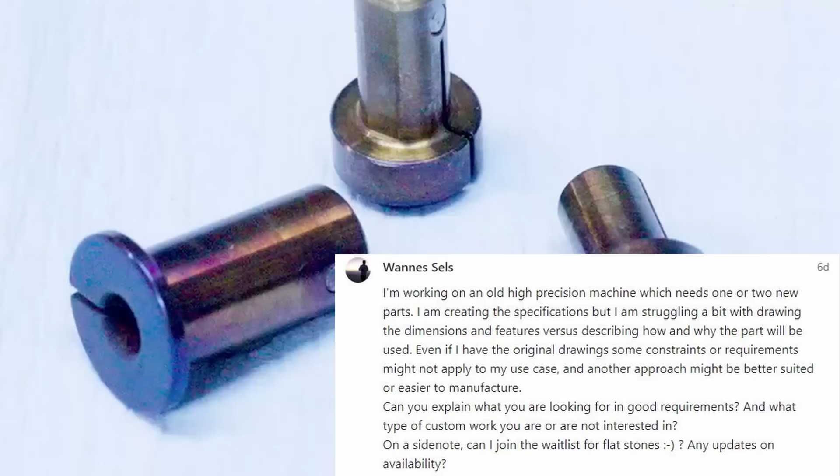If you know that you have a shaft with 10 millimeter diameter, for example, and it needs to slide freely in a hole, a very sloppy fit, you will dimension it diameter 10 for the hole. But then the machinist will see it and say, well, I could drill it diameter 10 or maybe 9.9. That's within the standard tolerancing. So in the drawing, you would have to add the call out to make it bigger. That's the first thing to understand. You need it to be bigger than 10 millimeters. So it's already 10 plus.

Now you have to think, is 10.000 still viable for the shaft that goes in there? The shaft has a tolerance too. So it could be 10 plus 0.1 millimeter and 10 plus 0.2 millimeters. So the hole can be between 10.1 and 10.2. But how do you know where to go with these tolerances? That's experience.

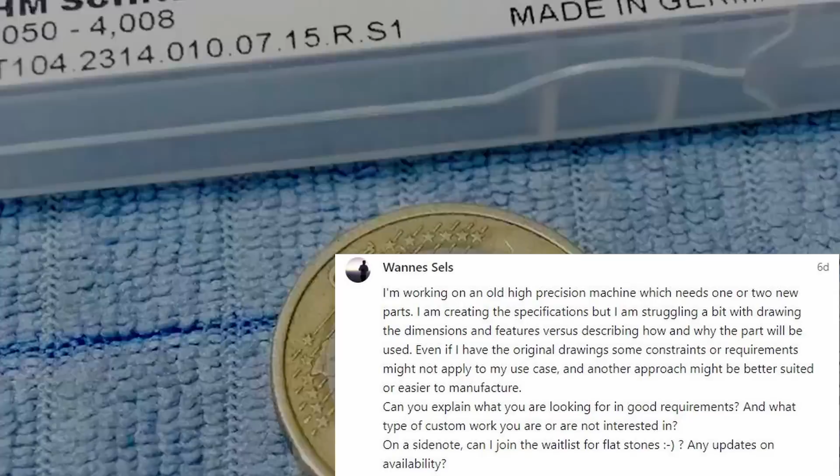In engineering books, you will find some hints and some guidelines on general tolerancing, and that will help you a little bit. I know this is not the greatest of answers, I have to say, but this is such a broad topic, and all of the tolerancing and geometric tolerancing stuff is something you could study, or you have to study really if you want to understand it completely and be able to apply it. And still then you will not be able to do it 100% correct each time.

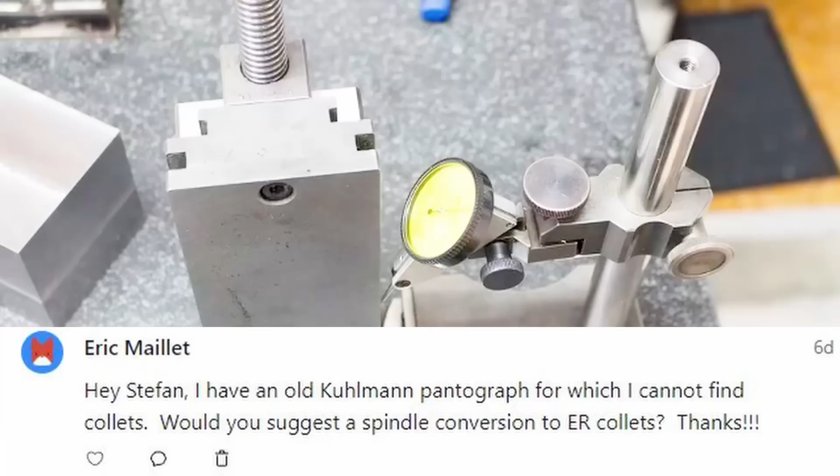Eric Maillet: Hey Stefan, I have an old Kuhlmann pantograph for which I cannot find collets. Would you suggest a spindle conversion to ER collets? Yes. I did that on my Deckel G1L engraver. I made a complete replacement spindle. I would not modify the original spindle because those are made really, really well, and maybe someday you will find the original collets. But I would recommend taking it apart, taking measurements, and starting from scratch building one.

For the spindle shaft, I would just buy a straight shanked ER collet chuck. Those are readily available and not horrendously expensive, and all the hard work on them is already done. And usually they are a nice sliding fit on a set of bearings, and then you're already off to a good start.

So, one last question from CellG88. What does the life of Stefan look like on a regular day, maybe daily schedule? How do you manage to do high precision work without a CNC lathe or mill? Well, I have a CNC mill right next to me. It's not a high precision machine. I use it mostly for non-critical stuff. I can do high precision work on it, but it takes a little bit of fiddling. For example, using cutter compensation to walk dimensions into tolerance.

A manual machine is not different to a CNC mill if it's a basic 3-axis or 4-axis machine. I have the DROs on the machine. If I didn't have DROs, I had the dials, which are also very accurate, or I could use dial indicators which actually show the travel, just like a DRO. So the precision doesn't come from CNC. The precision comes from the machine itself.